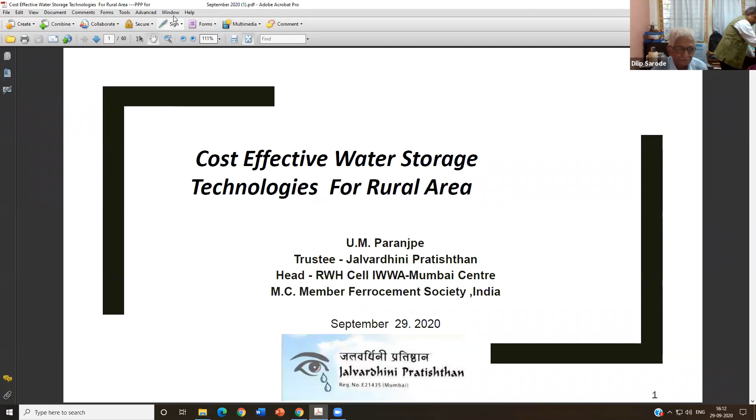Today I will talk on water conservation with cost-effective technologies. First part will be cost-effective technologies in a rural area. First I will explain to you how we can provide assured water to rural areas. Because if we know the technology but don't have water, then this technology will be of no use. So first I will talk on how we can provide assured water to the rural area.

So this is a slightly different approach for water. In rural areas, borewell, pond, talab, river, canal, or in some cases tap water are the sources of water for all their day-to-day activities, including agriculture. Since rainwater is the first source of water, we thought why should we not manage rainwater and try to fulfill the requirement at a rural level for all the activities, including domestic and agriculture. So what we say is, unless and until we try to manage rainwater, nothing can happen.

So first we say try to store as much rainwater as possible. Say if you are having 100 liters of rainwater, then out of that, 5, 10, 15, however much you can store, you first try to store it. Then out of the remaining, try to recharge subsoil and aquifer. And after that, whatever water remains, try to arrest behind a bandhara, because the water will flow in a nala to the river or streams. Then we try to arrest it behind a bandhara in the stream or river, and then we will use it.

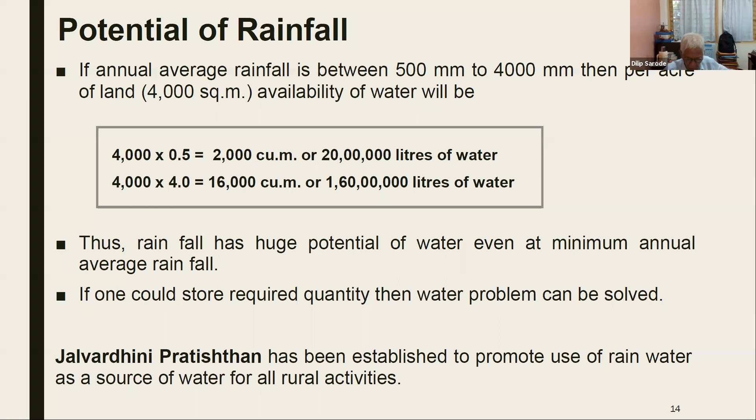So we established Jalvardhini Pratishthan in 2003 to provide an assured source of water. The word assured is more important, and at cost-effective technologies. As we are all engineers, we have developed a concept of rainwater utilization index, that is rainwater used during the year divided by rainwater potential of that land.

I will not go into much detail on this one, but as an engineer, we must know if you have a land of 4 acres and you are not using any water as a source of water, then your rainwater utilization index will be 0. So by the rainwater utilization index, one will come to know how much water that farmer or individual is utilizing for his own benefit.

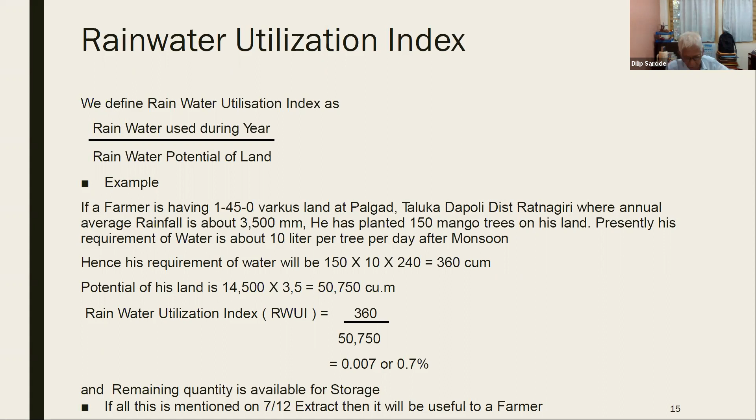See, any activity at village level begins from the 7-12 extract. That is what we say. And on the 7-12 extract, there is a column number 14. That column number 14 states what is the source of water for agriculture.

So in that column, if you have a land of 0.40.0 and the annual average rainfall is 1000 millimeters, then 4000 into 1, 4000 cubic meters should be written in that column. Generally in that column, only well, borewell or canal water is mentioned. But as rainwater occurs everywhere, rainwater is also a source of irrigation, a source of water. If that quantity is mentioned over there, I think the problem will be solved.

Then what will happen? Either we can ask the farmer, see, on your land this many liters of water is available, still why are you crying? Or a farmer will ask, sir, see, in my 7-12 extract this much quantity of water is there. If you know some technology to store it, please tell me so that my problem will be solved. So this is the beginning.

And in an urban area, you can write it down on a property card. So the potential of rainwater should be written in column number 14, which exists in our existing 7-12 extract in all the states; that quantity of water should be written on it.

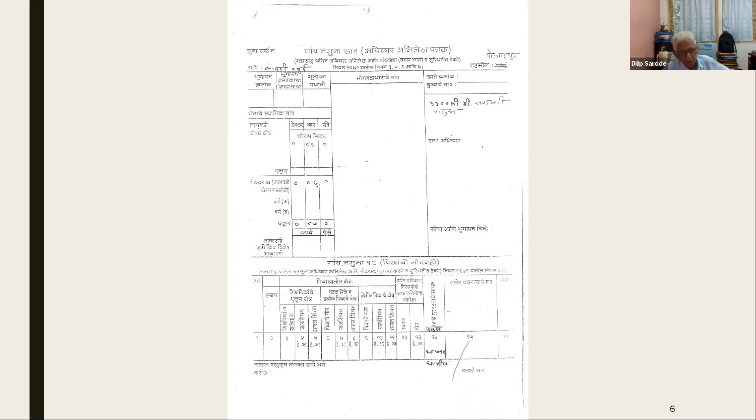Village level, as you know, in Maharashtra, 82% agriculture is rain-fed. Rain-fed means it has only rainwater as a source of water. As per the National Rain-Fed Area Authority, 66% of land in the whole of India is rain-fed, and in Maharashtra 82% of agricultural land is rain-fed. So rainwater is the only source of water for those landholders.

So if they could store depending upon the rainwater potential and their requirement, I think each and every individual farmer will have sufficient water, because rainfall occurs on every land. So now I have explained how one can get assured water to every individual farmer in India. There might be few places in India where rainfall occurs every alternate year or so. Those cases we can see afterwards. But in 95% of cases, rainfall occurs as per the annual average rainfall. And if you have an arrangement to store that rainwater, since rainfall occurs on every land, every farmer can store it.

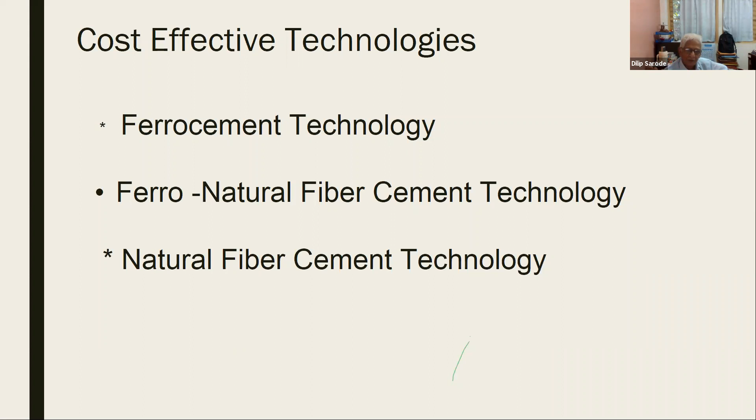So these are the 3 technologies. Now I explain how one can give assured water to practically everyone in India. First is ferrocement technology. Second is ferro natural fiber cement technology. In this, we have used natural fibers; we have replaced chicken mesh with natural fibers. And third is natural fiber cement technology. So we'll begin with ferrocement technology. Ferrocement technology is basically chicken mesh plus mortar.

Chicken mesh plus mortar. Chicken mesh, I think everybody knows it. But as chicken mesh doesn't stand on its own, what we do is we knit it on both sides of this weld mesh, tie it properly, and over that we apply a mortar, that is cement and sand in 1:3 proportion and water cement ratio of 0.4. And then this material is cured for a specific period, as in case of RCC, and then the structures can

be used. So now here I'll show you one video of ferrocement tank construction, and then I will explain further things. See, this is a slow motion. Basically now here you are seeing weld mesh and chicken mesh. This is written in Marathi, but chicken mesh is wrapped on both sides of weld mesh, and then it is knitted properly.

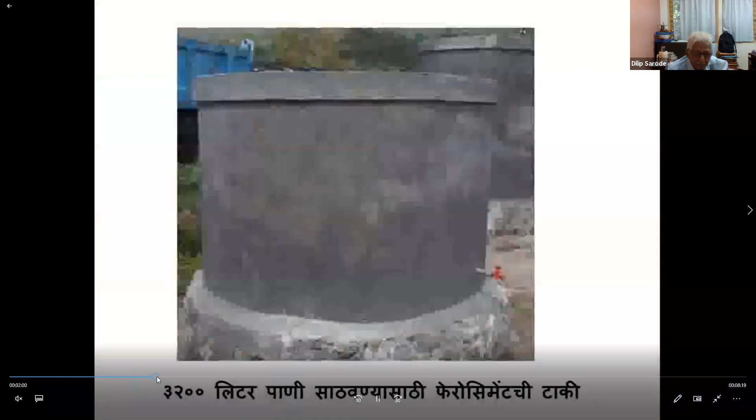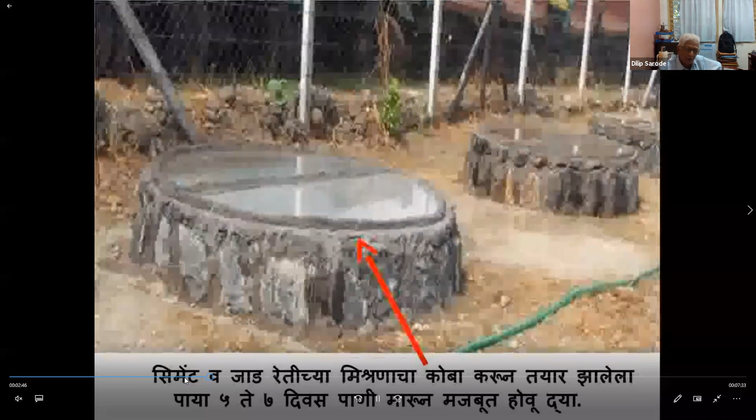Afterwards, see, whenever we have to construct a tank, we must construct a plinth, because this is a procedure to show how one can construct a tank above ground. So if you want to construct a 6 feet dia and 4 feet height tank, then you will have to construct a plinth of 8 feet dia and 1 feet above ground. So this is the plinth construction. This is the curing of the plinth, or koba, as we say in Marathi.

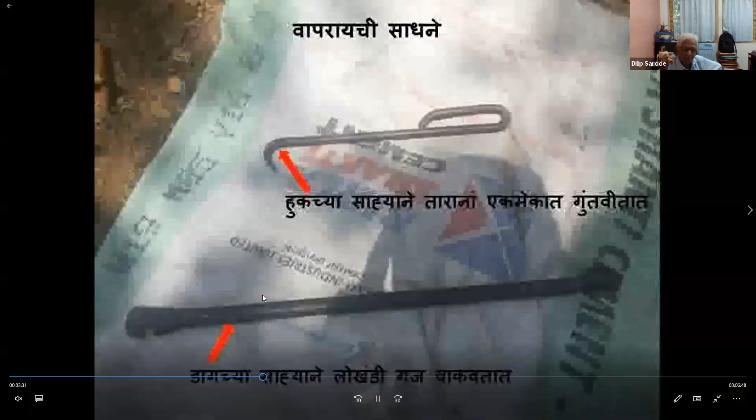So after curing, now here you will see we have kept this chicken mesh on both sides of a weld mesh, and now they will do the knitting. See, these are the instruments for doing it. Now they are knitting it. Both persons are knitting this jali, that is weld mesh and chicken mesh. Next.

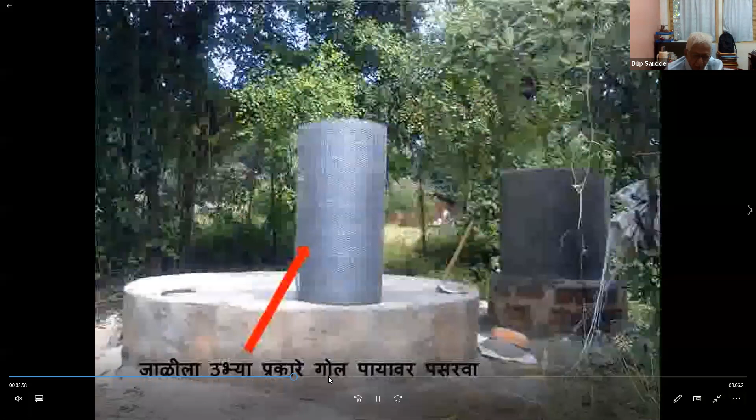After knitting is over, it is kept over this plinth. See, this is a plinth he is constructing, that is 10 feet dia and 4 feet in height. But as this weld mesh and chicken mesh doesn't stand on its own, we try to hold it with the help of this L-shaped bar. So now he is bending the steel bar with the help of an instrument.

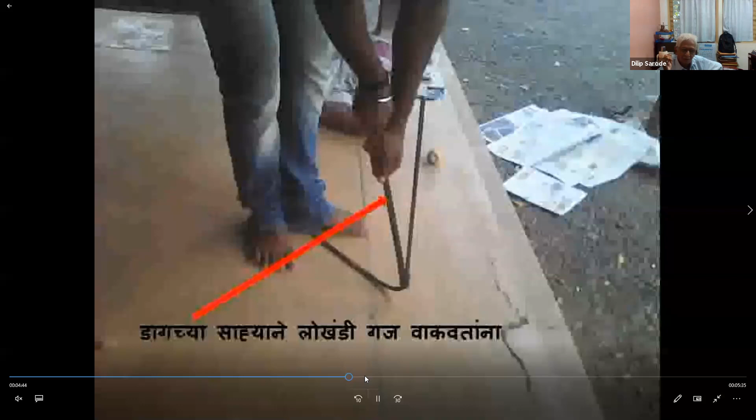In ferrocement, we use chicken mesh and weld mesh, and we use only 8 mm bars as skeleton steel. So first we prepare a skeleton of a tank or whatever structure we want. To that we apply this chicken mesh and weld mesh. Over that a mortar is applied, which you will see later in this video. And afterwards it is finished from inside and outside. So a tank gets ready within maximum 4 days.

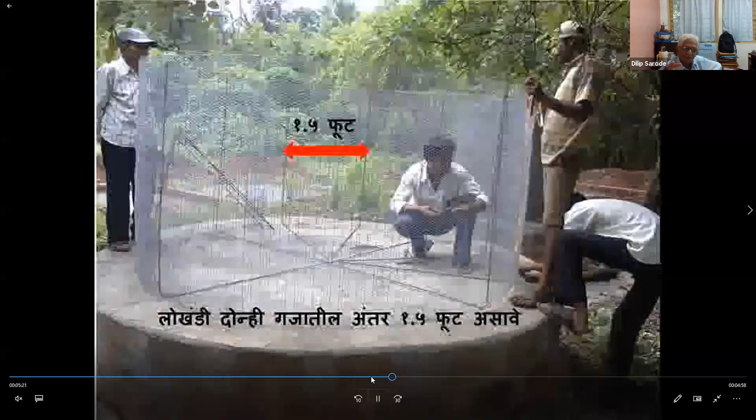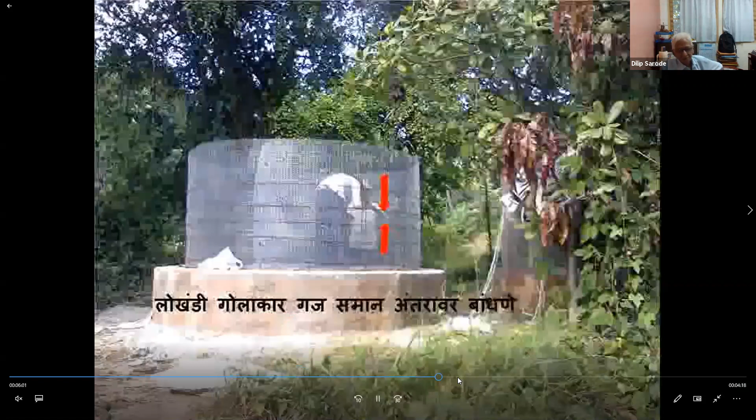So now with the help of this L-shaped bar, this chicken mesh and weld mesh is kept in position, that is a cylindrical shape. Now he is placing these circumferential bars. They are fixed at 6 inches interval. See, he is fixing bars at 6 inch center to center. The distance between two circumferential bars is 6 inches.

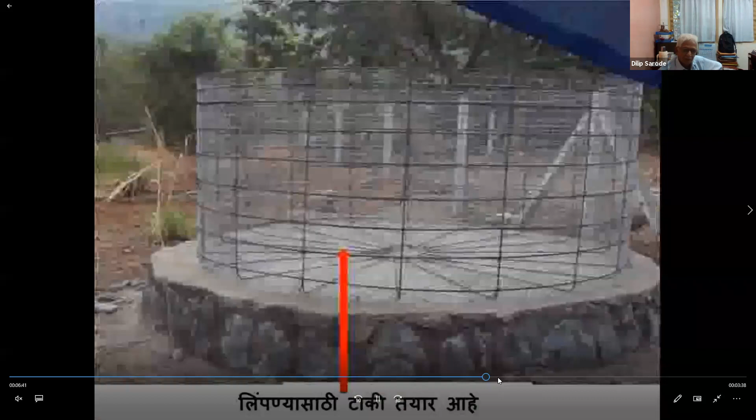Next. See, this is the skeleton of steel bar. To that we have fixed this chicken mesh and weld mesh, which was tied earlier. Now over this they will apply a mortar. Now he is mixing cement and sand. It is mixed in a 1:3 proportion, that is 1 part of cement and 3 parts of sand. And water cement ratio is 0.4.

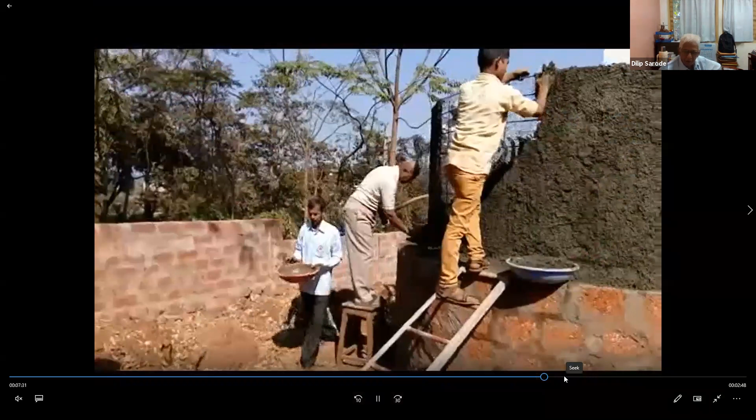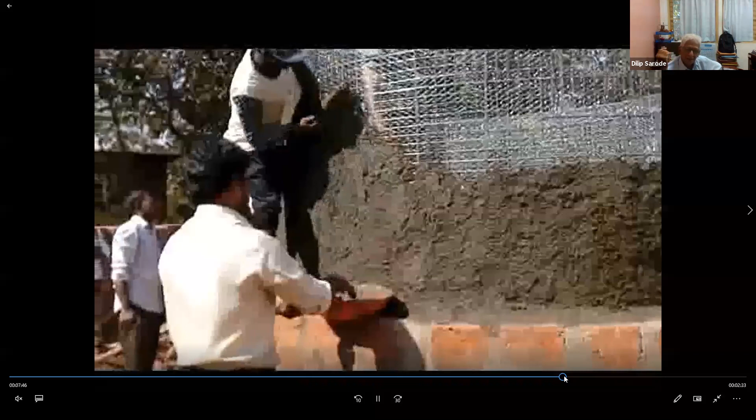See, they are applying it with the hand. Why do we say this technology is rural friendly? Because in rural areas, they have a habit of applying cow dung or matti on their walls. So they know this technology. So instead of matti or cow dung, if they take the cement and sand mortar and apply it over this chicken mesh and weld mesh, then it sets in a day.

And afterwards, on the second day, you plaster from outside, and on the third day, you plaster from inside, and your tank gets ready in maximum 4 days. And the thickness of this ferrocement is hardly 20 to 30 millimeters. These are newcomers, so sometimes we have a thickness of 40 to 50 millimeters. In RCC, the minimum thickness is 150 millimeters. So here the quantity of material is very less, and steel required is maximum 8 mm, only as skeleton steel. So cost-wise, it is very economical, and anyone can practice it.

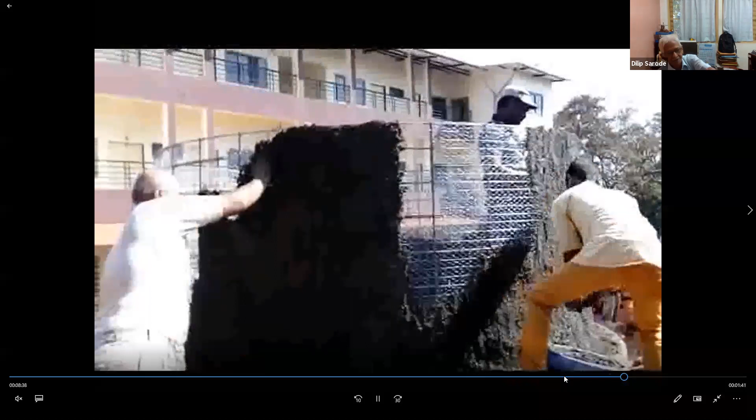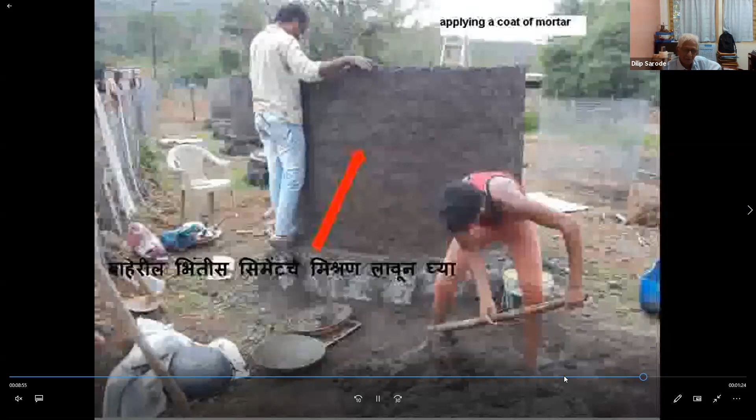Here on the left-hand side, he was a retired engineer who has purchased land in Dapoli and wanted to construct a tank. So we said, you come here and have a feel yourself. You do this yourself, so that you will be tempted to do similar tanks. After this, from inside they will apply this cement sand. We will plaster it.

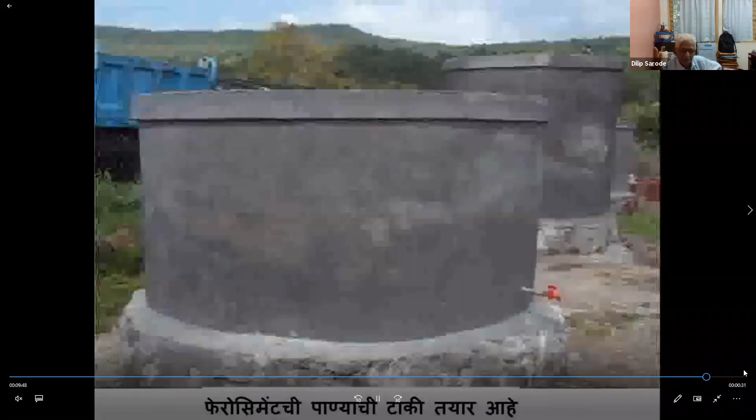See, the tank gets ready this way. And then curing is done with the help of these gunny bags. It is kept for 7 days, and it has a tap also, so you can draw water and use it by gravity. This ferrocement has a number of applications. I will show you afterwards. Now we go for the presentation.

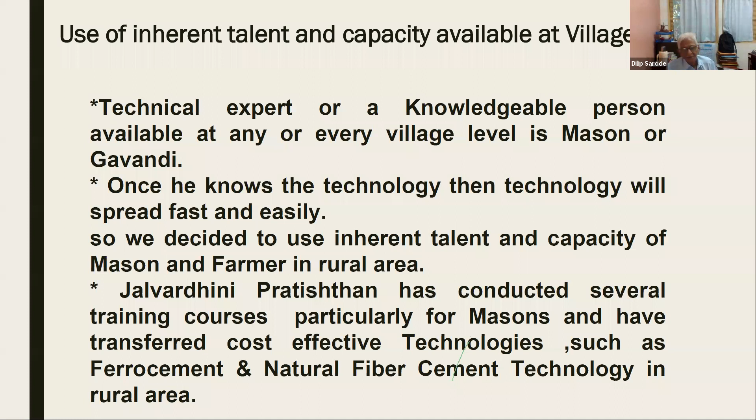See, ferrocement composite consists of rich cement and sand matrix reinforced with layers of wire mesh held in position with small diameter steel bars. Material is cured for a specific period, as in the case of RCC. Material required for ferrocement is cement, sand, water, and reinforcing meshes. Admixtures are often added, and steel bars are used as and when necessary to hold wire mesh in position.

For construction of a ferrocement tank above ground, I will explain there are 4 different methods available. First is up to 4 feet dia and 4 feet in height. That means up to a 1300 liter tank. You don't need any steel bar. This weld mesh and chicken mesh stands on its own.

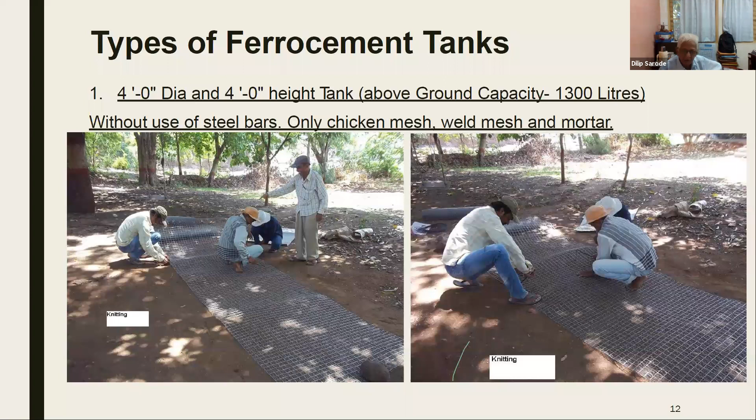Now they are doing here this knitting of chicken mesh and weld mesh. See here, on the left and right hand side, no steel bars are required. This weld mesh and chicken mesh stands on its own, like our tree guard. For a tree guard, you must have seen that it stands on its own. So similarly, up to 4 feet dia and 4 feet in height, that is capacity up to 1300 liters, you don't need any steel bars.

Only chicken mesh, weld mesh, and cement sand mortar, and a mason, or with a few days experience even a farmer, can construct his own tank, so that if he has 1300 liters of stored water close to his house, he will not have to go to get water for at least a couple of days or even for 4-5 days. So this is the arrangement to store water.

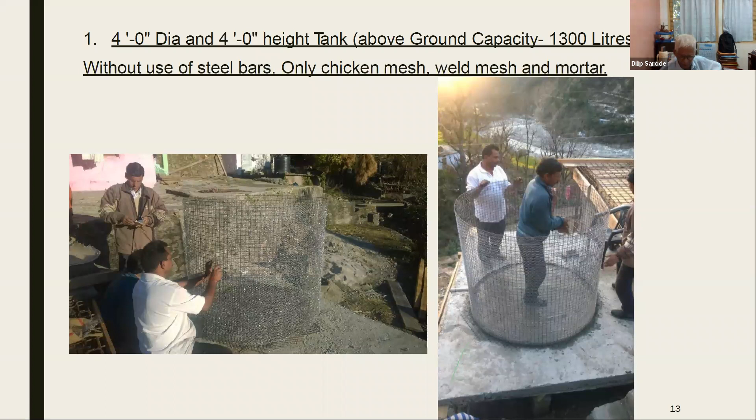So up to a 1300 liter tank, that is cylindrical shape, 4 feet dia and 4 feet in height, you don't need any steel bar. This is the first method of construction. See, this is a finished tank. One tank on the right hand side is in Uttarakhand, and one is in our Mumbai.

Another tank: when the size increases beyond 4 feet, this chicken mesh and weld mesh doesn't stand on its own. Why? When you try to apply mortar over it, it will buckle. So to hold it in place, we have these L-shaped bars and circumferential bars. With L-shaped and circumferential bars, first we prepare a skeleton. To this skeleton, we fix the chicken mesh and weld mesh. Over that, mortar is applied, and then finishing is done.

So at village level, the mason knows how to prepare mortar, how to plaster, how to do everything. The only thing he doesn't know is how to use this chicken mesh and weld mesh, or how to

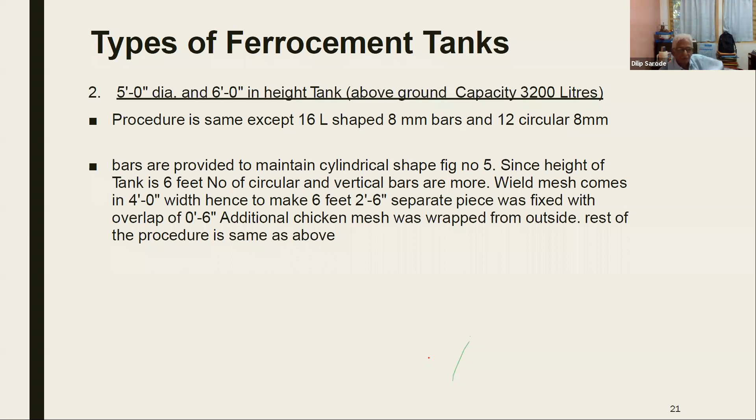So that is why we say, if you train a mason, he himself can replicate similar types of structures on his own at his village level or at any place. So this is another type of tank where we first prepare a skeleton of steel. To that we apply chicken mesh and weld mesh, and the rest of the procedure is the same as I explained earlier.

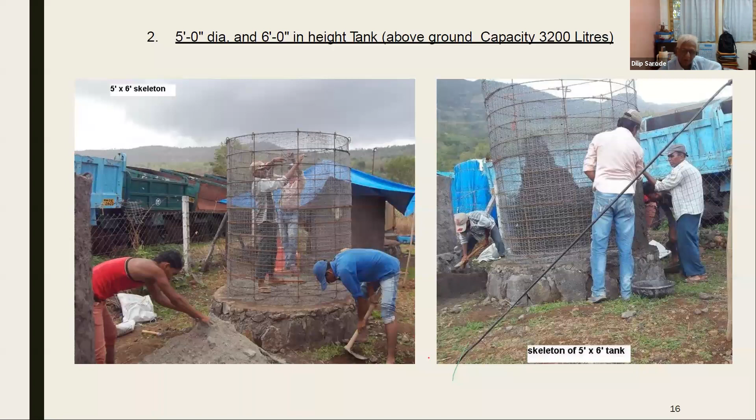Here at both places you will see this is 5 feet dia and 6 feet in height. First, the skeleton was prepared. To that, the chicken mesh and weld mesh is fixed. And on this side, they are applying the mortar. This is after application of mortar, and this is a finished tank. So like this, the tank gets ready within maximum 4 days.

This is a third type of tank, which you can say is similar to precast, where we have an inner ring and outer ring. The inner and outer ring have a gap of only 10 millimeters. In that, only weld mesh is kept, and only mortar is filled up within this inner and outer formwork.

And this third tank type, I saw in Bhubaneswar when I had gone with my daughter for her friend's marriage. There they have these 3, 4, 5 feet dia rings. If you want a 2,000 liter tank, he brings 4 rings of 5 feet dia on a hathgadi. He keeps them one over another, just builds the joint, and your tank gets ready. Here the maximum thickness is 10 millimeter only. You will see it in this one.

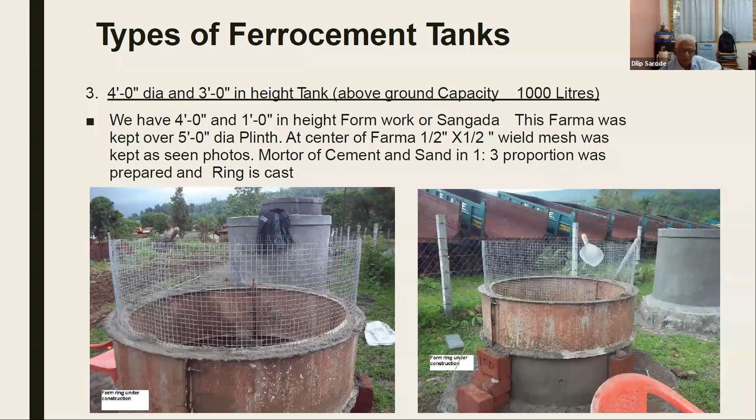See, this is a form finish where after casting one ring, this forma was lifted, the second ring was cast, and over that a third ring was cast. Since it is a form finish, the thickness is less. This will come under a precast type. Like this, even 10 feet dia rings are available in our Sindhudurg district. They use them for preparing wells. So such forma also can be used to construct this type of tank.

So this is the third type of tank where you have only 10 millimeter thickness, and only a weld mesh is there. So what will be the casting? If the mason or the farmer sees this once, and if he has a formwork, then definitely he will go on casting similar things without the intervention of any learned person.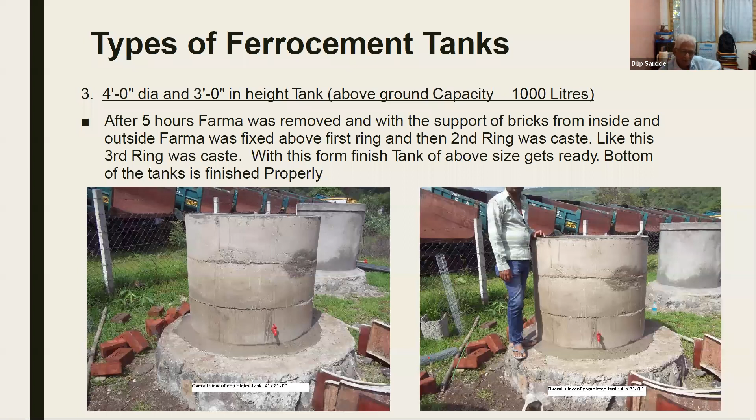Now we will go for a tank below ground. For a tank below ground, you don't need steel at all. First, you have to excavate as per the angle of repose. I think everybody knows angle of repose, means the angle at which soil stops falling on its own.

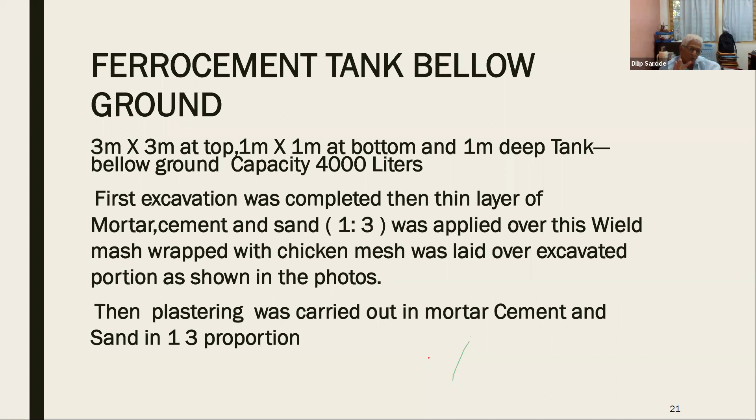So without knowing, he understands the angle of repose. So first you have to excavate as per the angle of repose. Over that you have to keep chicken mesh, knitted chicken mesh and weld mesh. On the left hand side you are seeing the excavated portion. On the right hand side we have kept the chicken mesh and weld mesh. Over that you have to do plastering and finishing only, so the tank gets ready.

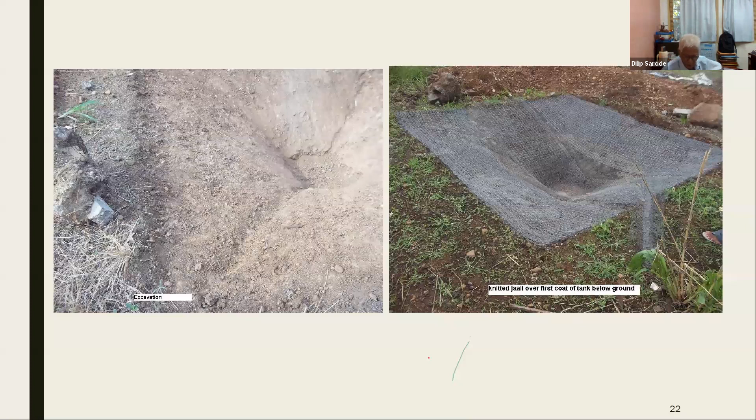So at village level there is no problem with excavation, plastering, or applying mortar. The only thing they don't know is they have to use this chicken mesh and weld mesh so that a watertight compartment will be formed. Because if you do only plastering, cracks are bound to happen and water will leak. So this is simple.

I'll show you afterwards a tank of 250,000 liters which we have constructed in Alibag. But this is a simple appropriate rural technology. Chicken mesh and weld mesh is available at the Taluka place. And once you introduce them to this technology, they go on doing it themselves, and they can fulfill their requirement without any problem.

We will see different uses of this ferrocement tank. This ferrocement tank can be used for a water scheme for a Wadi. At Getachi Wadi in Murbad, we have it for 25 houses. We construct one tank of 9 or 10,000 liters. Water is pumped to that tank, and as you have seen, there is a cock, and the people fill water from it. This 10,000 liters is sufficient for 15 to 20 families for a day.

Again, next day this tank gets filled up. So with minimum cost, this scheme for a Wadi can happen. We have done 3 such schemes. One is Getachi Wadi in Murbad. Another is Bharadin Wadi in Taluka Rajapur, district Ratnagiri. See, village people know how to lift the water, how to do piping and all that.

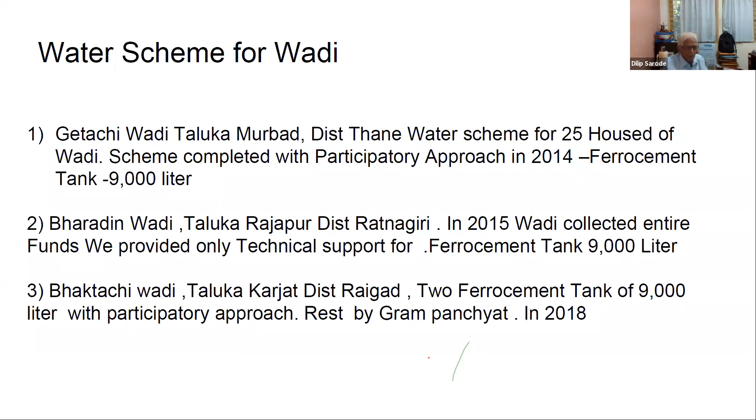If we construct that, then they will pump the water from a nearby source into that tank, and from that tank the villagers will take the water. So this ferrocement tank can be used for this water scheme.

Now see, in Kudal we had conducted a workshop for 40 masons. This mason understood what ferrocement is. First, you have to prepare the skeleton. So he thought he will construct his own WC. He constructed, on the left hand side, the skeleton with the help of steel bars. He fixed the chicken mesh and weld mesh.

And the wife and husband and the people of the house, whenever they got time, did the plaster, and it was done. So this is a cost effective technology. Cost of this will be what? Very less. And they know this technology, and this ferrocement they can use for the WC, bathroom, even for small walls.

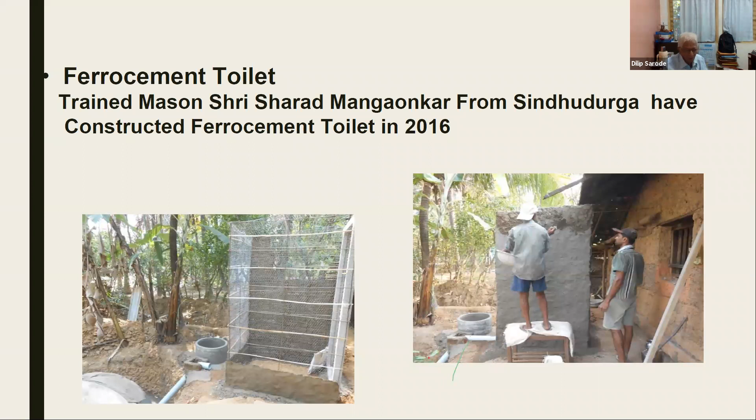And even after monsoon, if 1,000 or 1,200 liters of water is stored, they can use it for 2-3 days. So even a small tank of 1,000 or 1,200 liters has a utility. So we say every farmer should have this 1,000 liter tank by the side of his house and a bigger capacity tank at his farm.

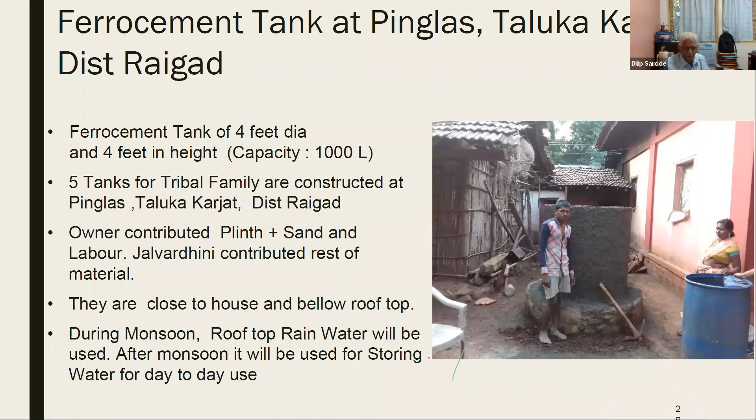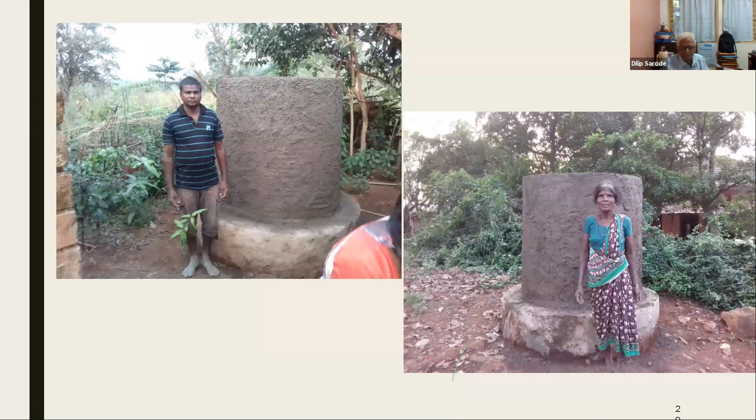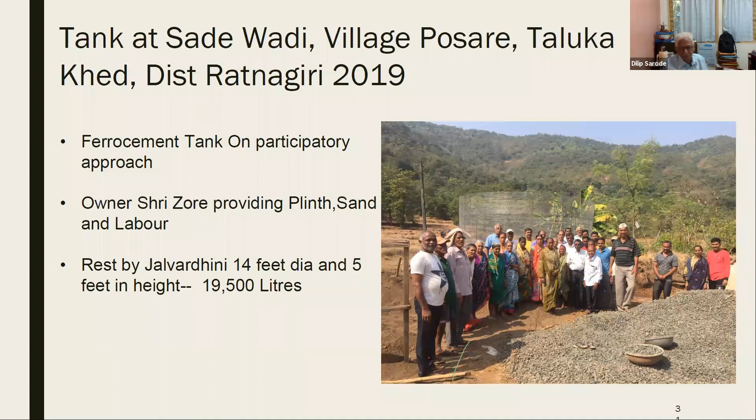Because the wadi has a source somewhere around half a kilometer or a kilometer away. From there, they know how to bring the water. For that also, they don't need any consultant or contractor. They bring it over there, and they have developed a good pipeline system and everything. See, this is in Khed Taluka in Ratnagiri. People are prepared to work. Only our intervention should be that we have a technology which is replicable and which they can understand easily.

This is another interesting one. In our Karjat Taluka, the mason was there when we constructed our initial 4 tanks in 2004. He just understood: if you want to make ferrocement, what do you have to do? We have to prepare a skeleton. So his brother wanted to construct a temple and was short of funds, and for a Mandir Kalas a lot of money is required otherwise. So one day he prepared this type of skeleton, fixed chicken mesh and weld mesh, and called me: sir, I have done like this.

Will it stand? I said, you deserve praise. Even a consultant from Mumbai will be reluctant to give a design, or he will say, I will have to visit the site, I will have to do this thing, that thing. Okay, some corrections were required at the bottom, for which I asked my consultant friend. But see, on his own, with whatever means he has, he's an entrepreneur. They can try anything.

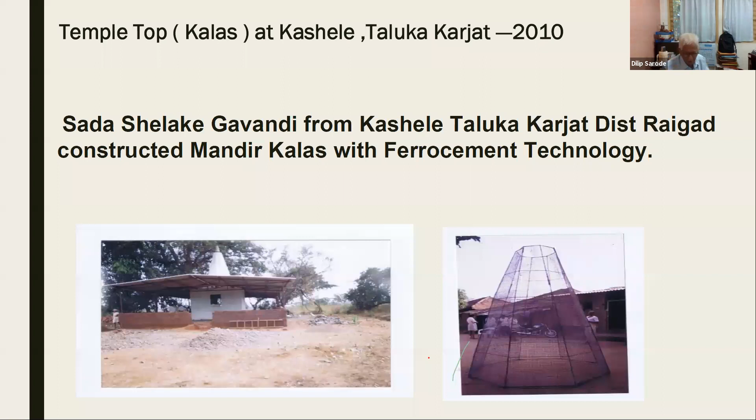This is interesting: we were invited to conduct a workshop for the blind in our Varli. We have a blind school there. Their teacher came to our Dadar office one day and requested me to tell their students about water conservation, because I love water conservation rather than this technology. So I said our condition is that if you are prepared to work on the field, then I will come and give the information.

I thought I may not have to go to Mangaon, which is away from Mumbai. After a couple of days, that teacher came and said even our blind students will work. Then I had no choice; I had to go over there. Actually I didn't go, my wife and my daughter went over there, and my karyakartas were there.

And see how happy they are. See, they are doing their knitting work and everything. So this is a technology which even blind people can do. So I am very much for this. How happy they are, if you look at them, see how they are working. This is the technology for everyone. And such technology I have not seen in our civil engineering, where anyone can play with it.

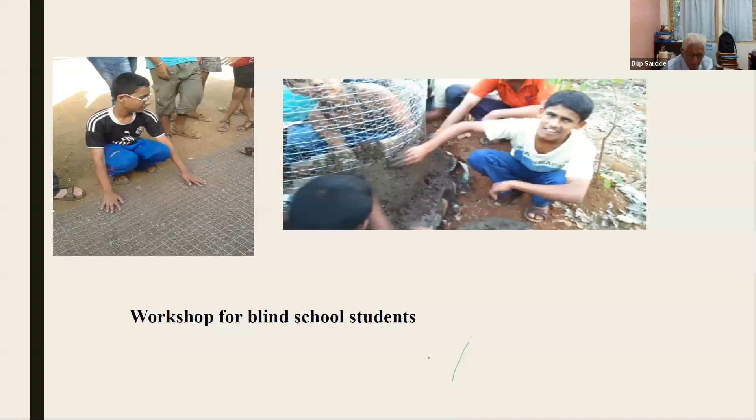This is a ferrocement museum at Karjat. Why did I want to construct a ferrocement museum? See, I explained to you 4 different methods of construction. If you call me or anyone to construct a tank, you might construct a tank with one technology only. But as an engineer, I thought the engineering student, or anyone who is eager to see, must be in a position to see all these 4 types of technologies at one place itself.

So at Karjat, we have developed this ferrocement technology. There are 9 tanks, and these 9 tanks are constructed with these 4 different methods. So when many engineering students come to see this site, I explain to them what ferrocement is and how ferrocement tanks can be constructed with different methods. And when you construct with different methods, different quantities of material are required. That is the interesting part of this technology. I'll tell you some other time.

See, even this ferrocement technology can be used for bandaras. Now, whatever we have seen is the application at rural level. That is for storing water, constructing walls, constructing this temple top, constructing bathrooms; you can construct walls also. So you can construct your houses also. Everything is possible with this ferrocement, once you have worked with that technology and you have the confidence: yes, I can do it.

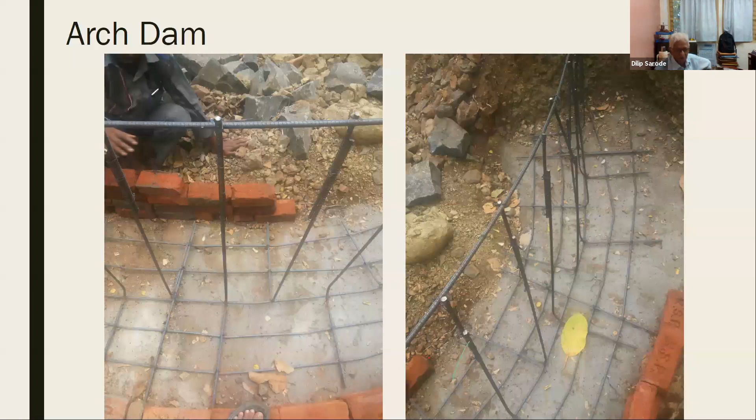So in our dams also, normally our dams are at right angles to the flow of water. But here we take the benefit of the shape of a structure, that is an arch type structure. I'll show you. See, this is complete. So this is a finished product. Here also the thickness is the same. Thickness is maximum 50 millimeter.

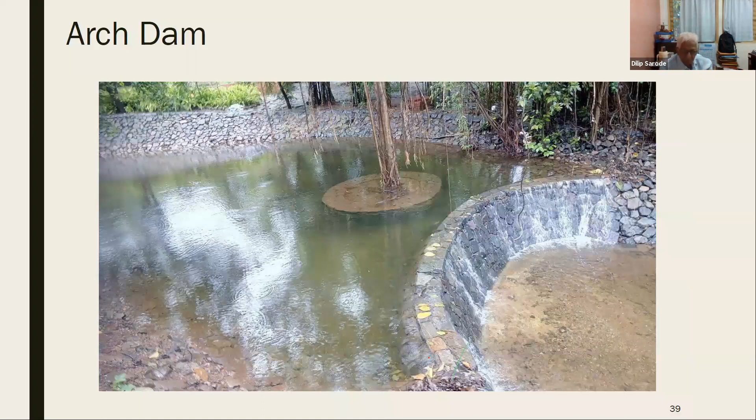So our principle is that first we have to prepare the skeleton with the help of 8 mm bar. So first we prepare the arch type structure, that is the arch shape, with the help of this 8 mm bar. And to that we have to fix this chicken mesh and weld mesh. Over that you apply mortar, and then you do plastering. Of course, for this arch dam you have to do proper anchoring at the ends. But with this simple technology, these arch type dams or bandaras can be constructed cost effectively. And here also the thickness is the same, maximum 50 millimeter.

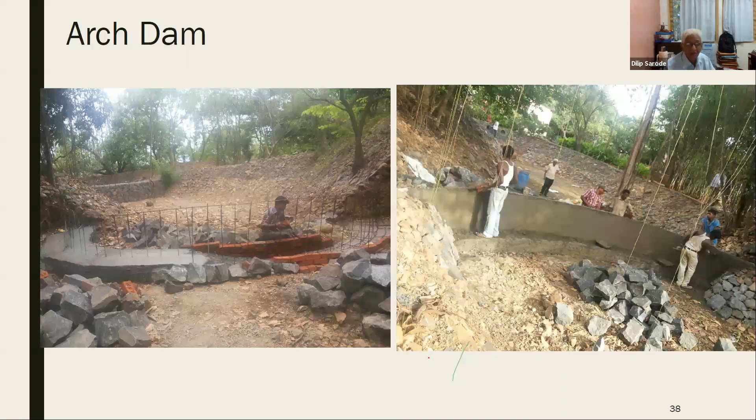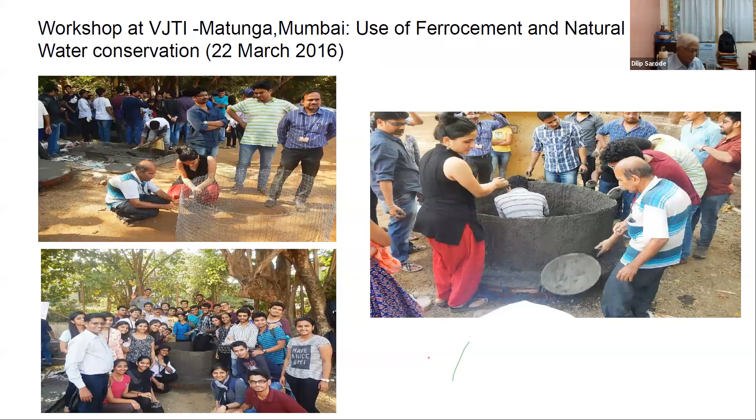Yes. So we have conducted workshops for 13 polytechnics, 18 engineering colleges, and 2 architectural colleges. So we have covered all types of engineering students. See, these are students from VJTI. See how happy they are, because they know the technology. What we do is we first construct a tank and then we give the lecture, not lecture first and practical afterwards. Now we will go to another thing, that is natural fiber cement technology.

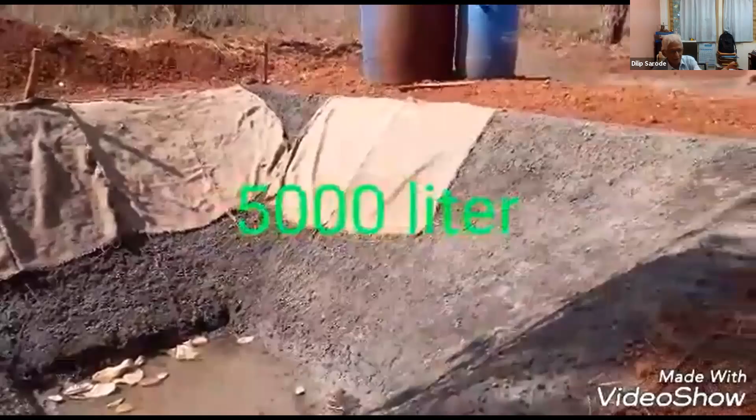So now you will see how this coconut coir cement tank is prepared. First excavation is done as per the angle of repose. It is at Guagar in Konkan region. See, the excavation is done as per the angle of repose. Normally it is 45 degrees in our Konkan region.

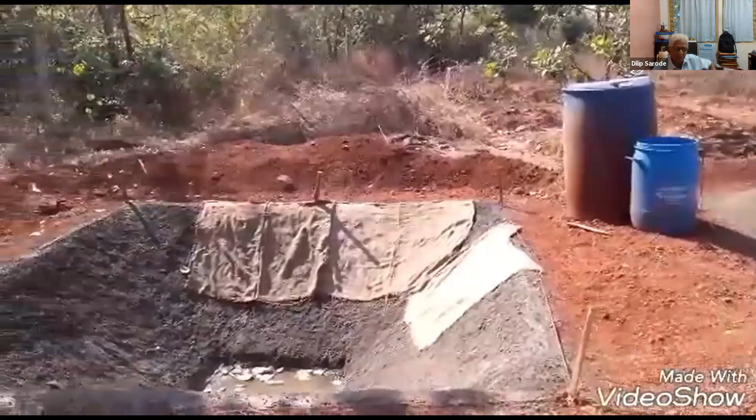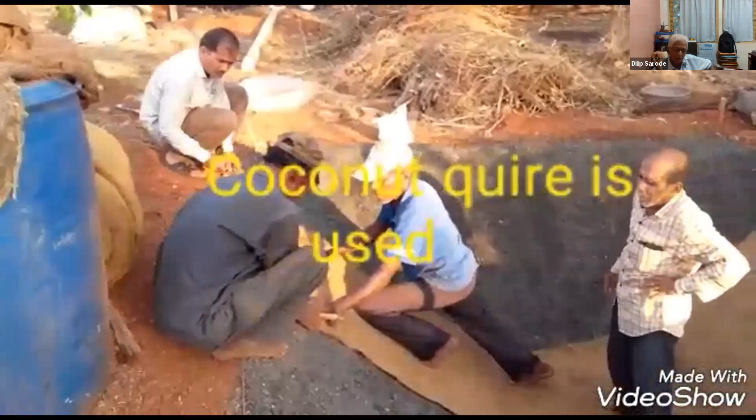So after excavation is done, they have this just cement and sand one, that is chat marne, as we call it. And over that now they will spread this coconut coir mat, that is of 300 grams per square meter. See, this is a mat. It is 300 grams per square meter. It comes in a 3 feet width and 50 meter length. So it is fixed properly with the help of nails. Then water is poured, and over that it is plastered.

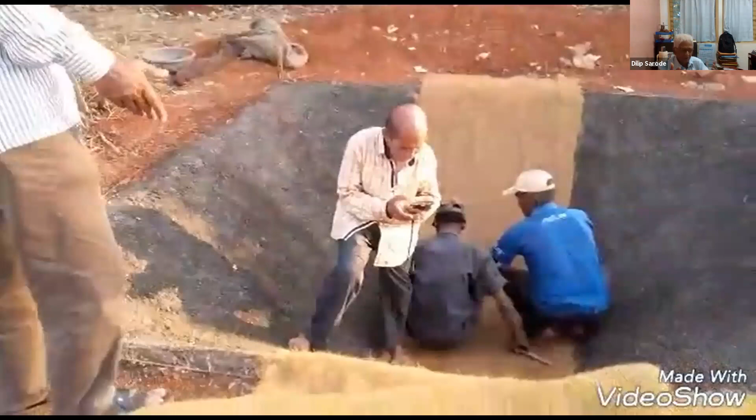So at village level, they know excavation, they know plastering. What they don't know is to keep either chicken mesh, weld mesh, or these naturally available fibers. So once they know this, this coconut coir or these natural fibers act as a crack controlling and bonding material. Study on this has been completed by IIT under Dr. Eldo, and they have recommended 350 grams per square meter can be used for these water retaining structures. And we have constructed one 250,000 liter pond at Nere. That photo also I will show you.

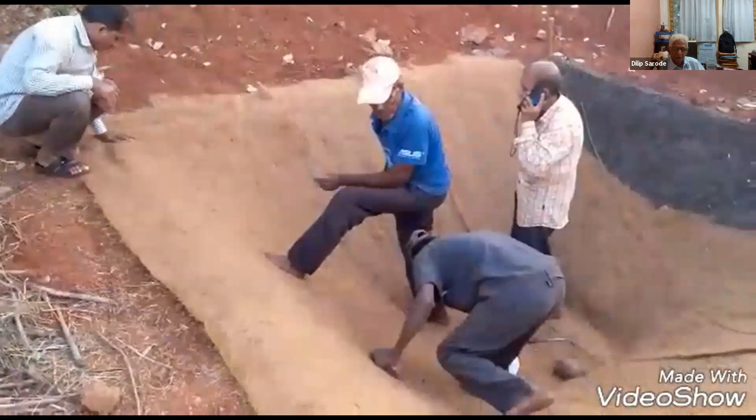After fixing this, they will apply this cement slurry, water and cement slurry, and over that they will plaster it. She is applying this water. And then you will have this cement. See, cement slurry is just being applied. Then he will keep it for a day, and over that he will do the plastering. So your tank gets ready.

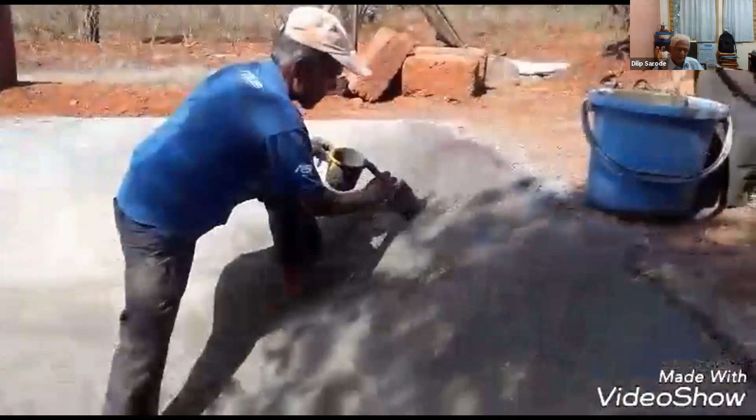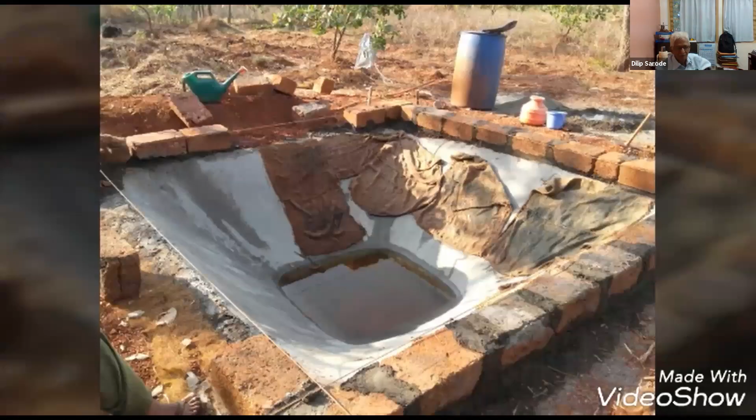So this is a simple, appropriate rural technology. Fibers are available in Konkan region or all along the coastal line. We have coconut coir available. Banana fibers are also available. Ambadi fiber is also available. So if they are used as a crack controlling and bonding material, then the cost is very minimum, hardly around 2 rupees a liter.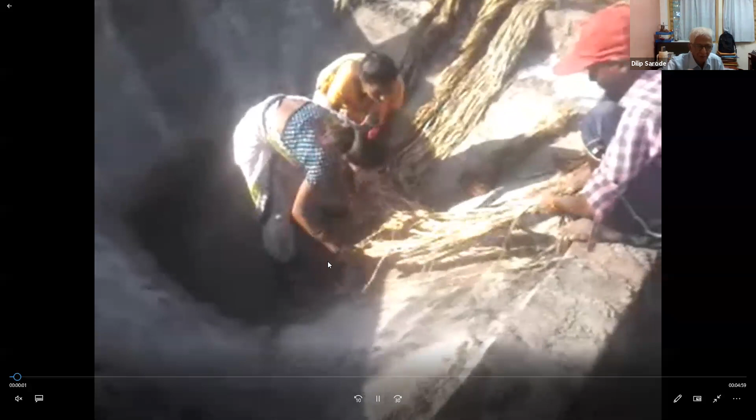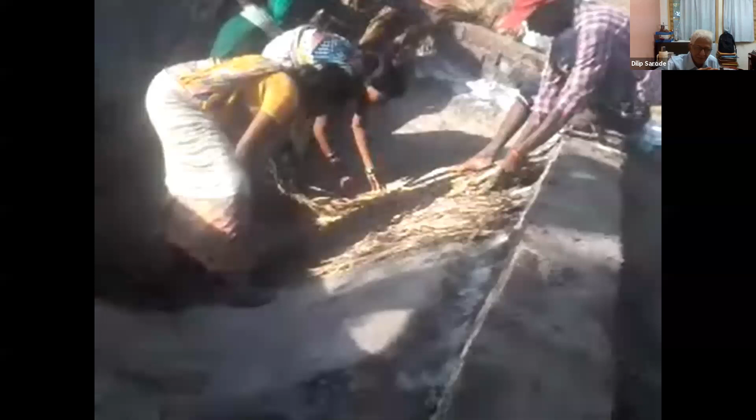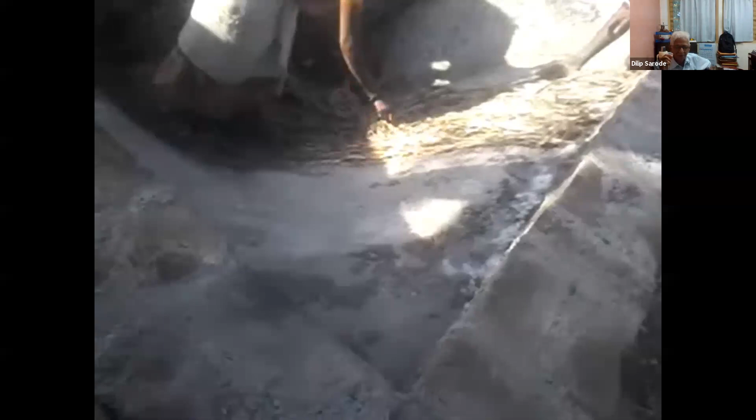See here I will show you. There that mat was there, but here see these ladies are fixing. This is the Ambadi fiber, that is known as a flax fiber. It comes 6 feet long, and they fix it. Then they will apply over this water and cement slurry, and over this they will plaster it. So once they plaster it, these fibers act as a crack controlling and bonding material. And now this study has been completed on scale down models at IIT and scale up model also.

So one can definitely use whatever is local. We have used many. In Sindhudurga, we have Kewan and Kumiya fibers. So whatever fibers are available, they are used as it is. See, no treatment is given to the fibers. Whatever way they are available at village level, because village people know how to extract these fibers, the same fibers are used.

Only thing, it is around 300 grams per square meter. But the mason doesn't know what is 300 grams per square meter and all that. He knows if he keeps more fiber, then plaster will not hold on it; he understands that. So he understands this technology. Whatever way one may take it, technically it has to be around 300 grams per square meter. It is spread, and then now they will apply this.

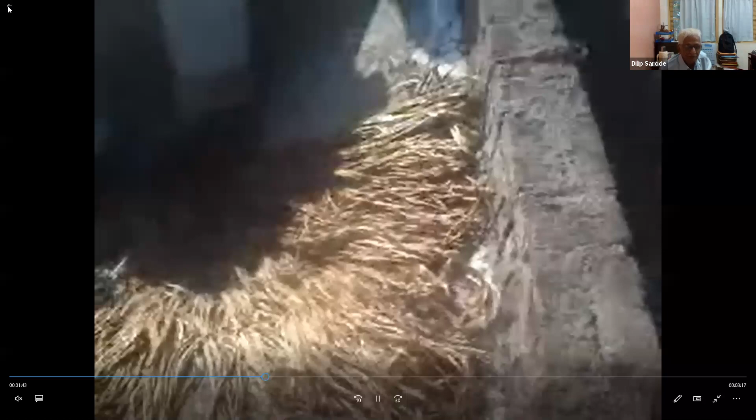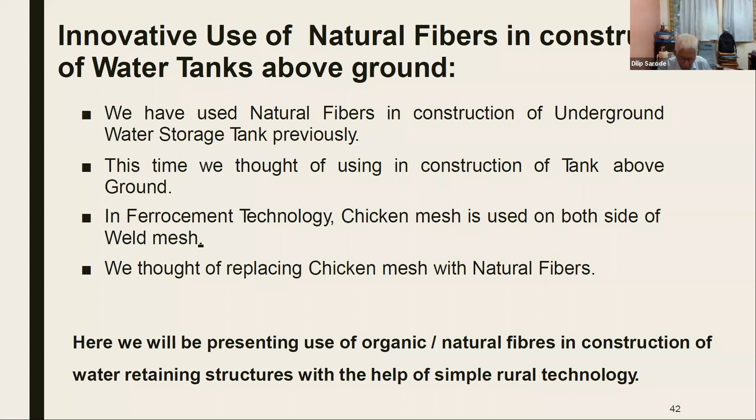So this is our first innovation where we have used natural fibers in construction of tank above ground. See, this is our another innovation where we have replaced ferrocement. You have seen chicken mesh and weld mesh. So here we have replaced chicken mesh with the help of natural fibers. Over that cement slurry is applied, and then over that the plastering is done.

Sanika Rajurkar from SIDCO. They had come to see this. I said this is something new. I don't know whether this will stand or not. But then this stood, and we have constructed many such small size tanks. So this is a real appropriate rural technology.

Study on this type of tank, because here we are using fibers as structural members. When we construct a tank below ground, they are not structural members. They are only a crack controlling and bonding material, as far as I know. But here they definitely act as a structural member. The study is yet to be completed.

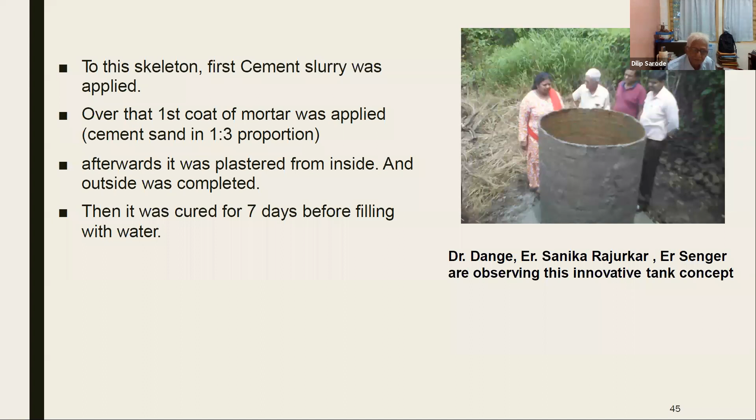Now we will go to this innovative use of natural fibers. We first constructed a tank in 2004 at Badlapur, where Dr. Sarode has taken this land, having his own farm. So from 2004, the complete bonding is so perfect. There is no question of any leakage or anything.

We have used coconut coir, flax fiber, banana fiber, jute fiber, Kewan fiber, and Kumiya fiber. So we say that whatever fibers are available locally, if you use them as a crack controlling and bonding material, and if you can replace chicken mesh with them in a tank above ground, I think these fibers will have a market.

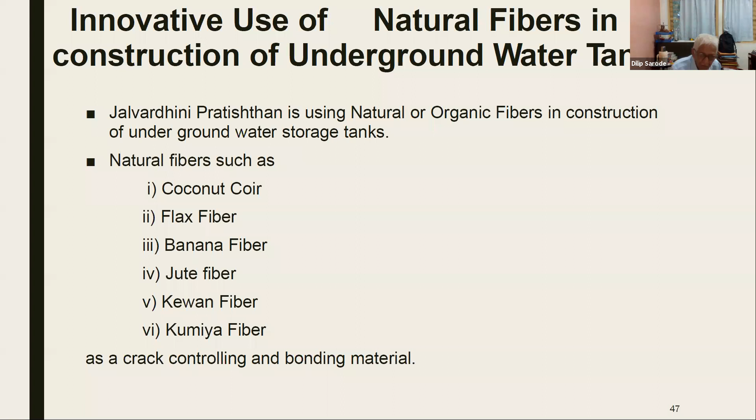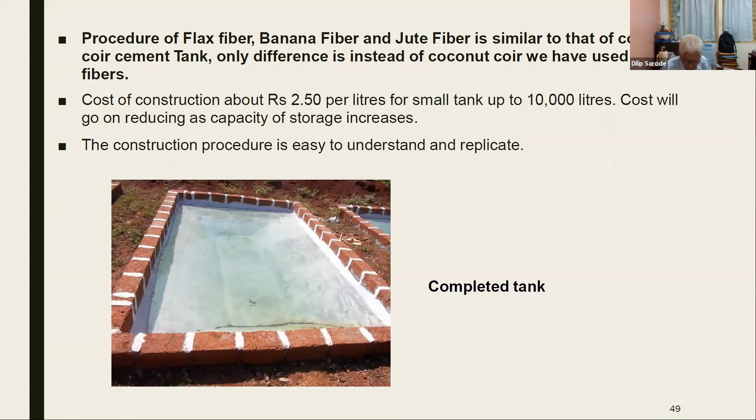We have developed many 10,000 liter tanks in our Konkan region, and a few we have constructed in Marathwada. The cost of this tank, including excavation, for this 10,000 liter is hardly 2 rupees to 2.50 rupees, including the labor.

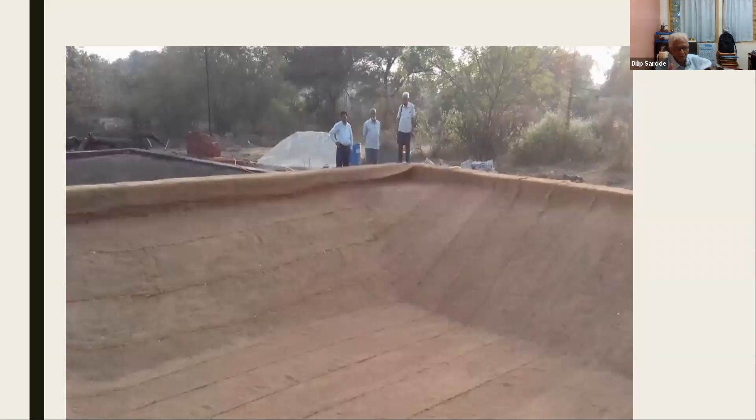See, this is the experiment on a scale down model. You see Dr. Eldo and others, our Indian Water Works Association engineers from Mumbai Mahanagarpalika and Maharashtra Jeevan Pradhikaran. They had come to see this on a scale down model. The first study was done at Bombay IIT, and on a scale up model, we are doing it at Nere, Panvel, where I will show you photographs of 250,000 liters.

See, this is a tank of 11 meter by 11 meter and 2 meter deep. At the bottom, it is 7 meter by 7 meter. This coconut coir is spread, over this cement slurry was applied, and then it was plastered. See, this is the tank, and the study on this will be completed this year. But people are using plastic or ferrocement lining, so one can go for this natural fiber lining also for ponds or shettale.

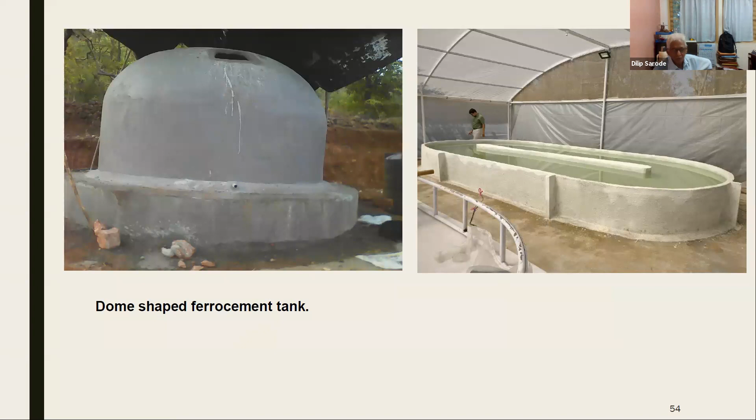These are the ferrocement tanks. This on the right hand side is just like a swimming pool. Any shape is possible in ferrocement. See, this is a ferrocement tank at Katalpada, having a capacity of more than 2 lakh liters. Excavation was done as per the angle of repose. Over that, chicken mesh and weld mesh is laid. No steel bars are required, and over that, the plastering is done.

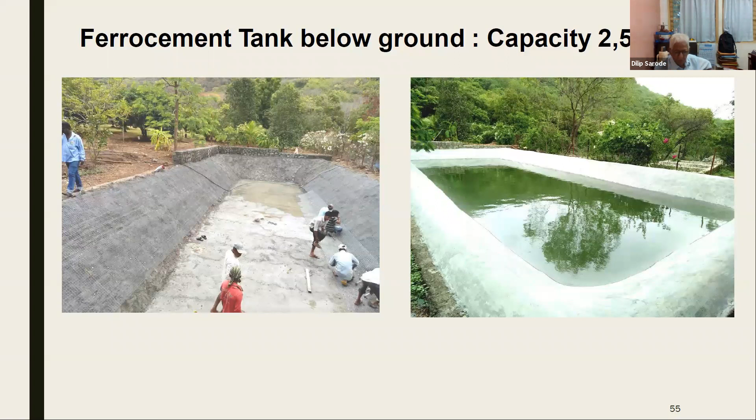So, we have trained many NGOs also. These are the NGOs, and then the NGOs have done many things on their own. Cost of a ferrocement tank below ground is around 2 rupees per liter. For a ferrocement tank which is open at the ground, because for horticultural purposes they don't need closed tanks, an open tank is okay, and the farmer knows how to close it as per his need, and then the cost is around 4 to 5 rupees maximum.

And the cost of a dome-shaped or closed tank, which one needs for drinking or any other purpose, is between 5 to 6 rupees. This cost includes the cost of a plinth. Because if you buy a Sintex or any other tank, you have to construct a plinth also, and then all that money goes to the company. The villager doesn't know the technology. Here the added advantage is that at this low cost, the farmers or villagers also learn one additional technology which they can use for their own benefit.

Summary: we have introduced this technology among various groups or categories of people. You have seen from blind to normal, uneducated to highly qualified.

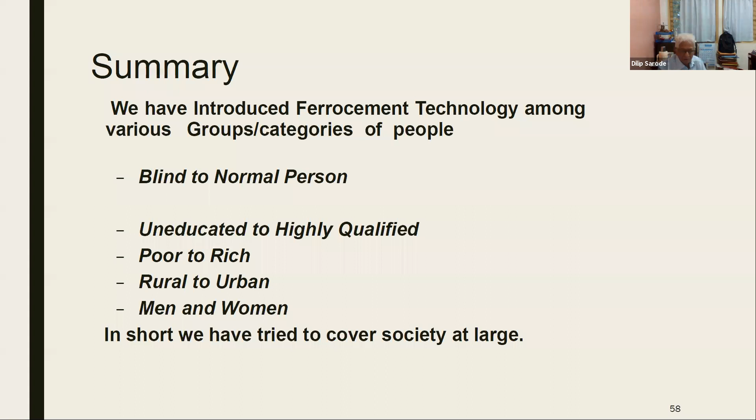Blind to normal, uneducated means even tribals can work, and in our engineering even doctors can work. Poor to rich means even if you have 1,000 rupees, you can construct a smaller quantity. If you are rich, you can have a crore liters. Rural to urban and men to women. In short, we have tried to cover society at large.

Summary: we have constructed more than 40 using natural fiber. Sites are different: Maharashtra, Karnataka, Gujarat, Uttarakhand also. We have trained Reliance Foundation engineers also, and they have constructed thousands. We have trained engineers, masons and others. Here I'll tell you why we have mentioned this.

Jalvardhini Pratishthan has constructed 8,000 liter and 15,000 liter ferrocement tanks for the benefit of farmers. Here we do it with a participatory approach. The farmer contributes plinth, sand and labor, and we do the supervision and provide the rest of the material. How much does it cost us? For 8,000 liters, we accept a donation of 25,000.

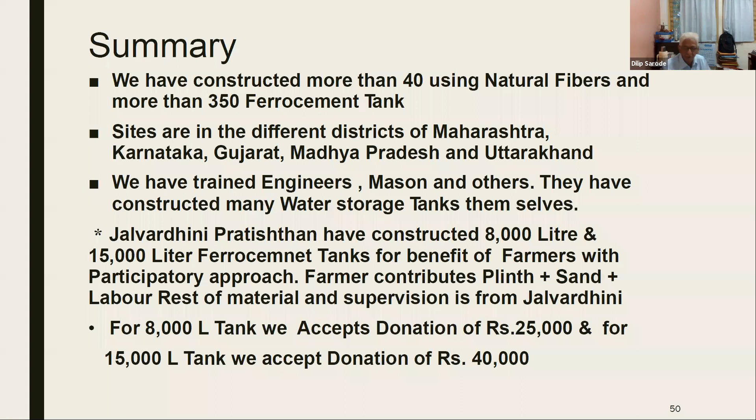Can any engineer construct a tank in such a small amount? And for a 15,000 liter tank, we accept a donation of 40,000 rupees. So with 25 or 40,000 rupees, you can definitely make one family happy. And with this amount, you will be transferring a technology. In 25,000 rupees, we can do some technology transfer at a village level. Thanks. You can ask any questions if you have.